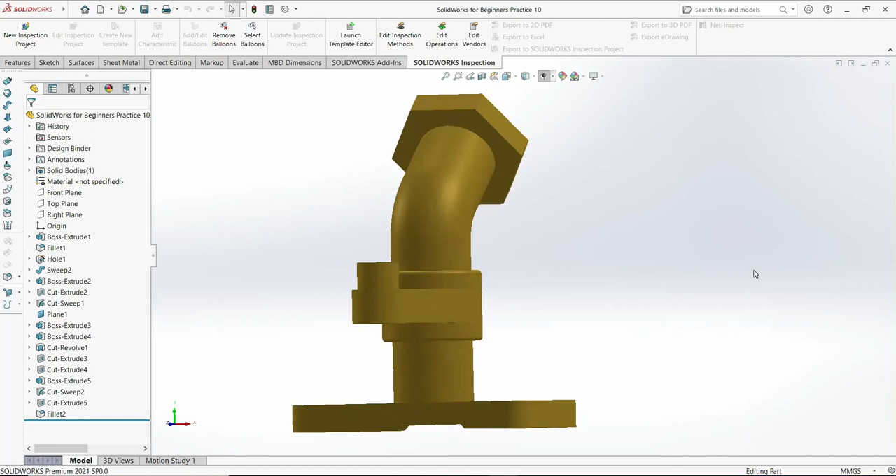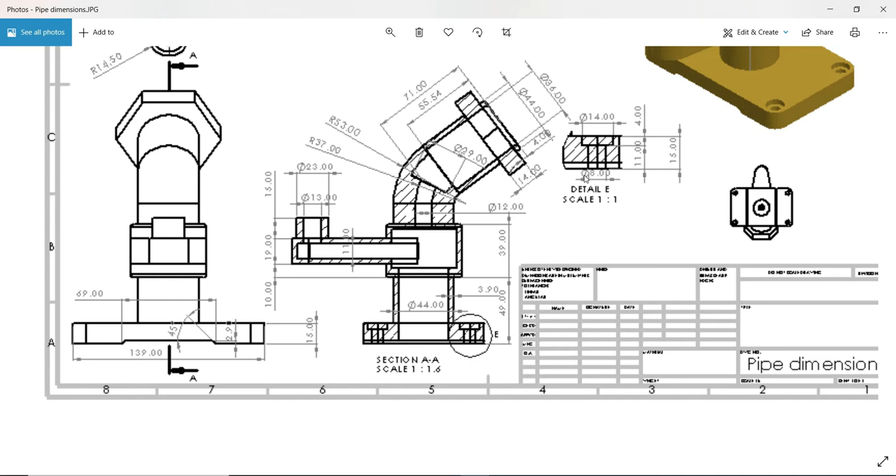Let's make step by step this drawing in SolidWorks, last version. As you can see inside, we have all this hole with different sizes. While we make this drawing, you will learn all these commands. I have the same one with the dimensions, and I'll leave the link below so you can follow along.

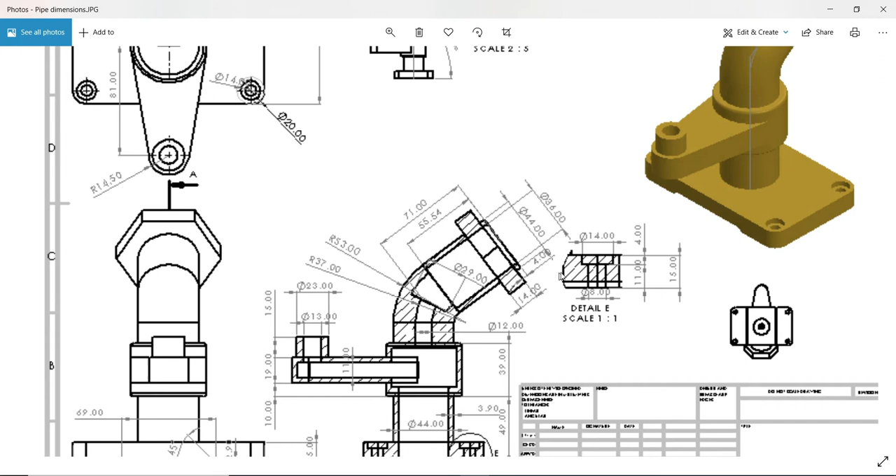We'll start with the base, which has dimensions 87 and 139 with a width of 15. Then we'll make this pipe in the middle of it. Then we'll make all these holes, which are counterbore holes—we have the detail for the hole here. We're also going to make this support in the middle and this arm.

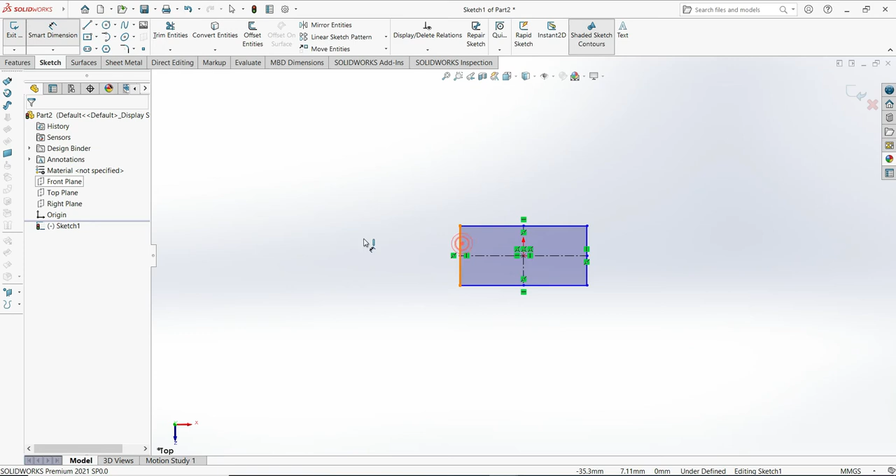Let's start here and go to SolidWorks. I'll start with the top plane first. Go to the top plane and activate the rectangle, center rectangle, and define the size: 87 and 139. Then okay, extrude base—here will be 15, very important, 15.

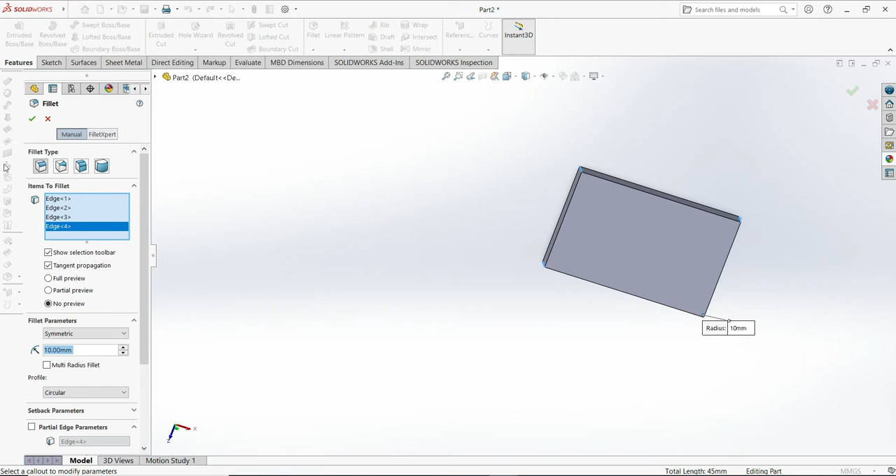Now we're going to use fillets, which will be 10 on all four edges. After that, we're going to use the hole wizard and counterbore. The option is 6. Make sure it is 8, 14, and 4. Choose the position, put your cursor, find the center, and click the center of each one.

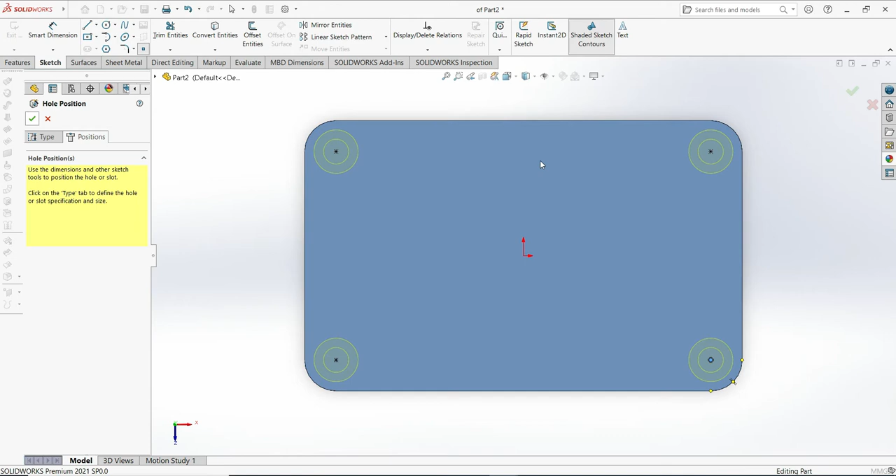And then OK. Now let's make the pipe in the center, using the right plane. I'm going to make a line like that, and then define the line with smart dimensions: here 119, and here 71.

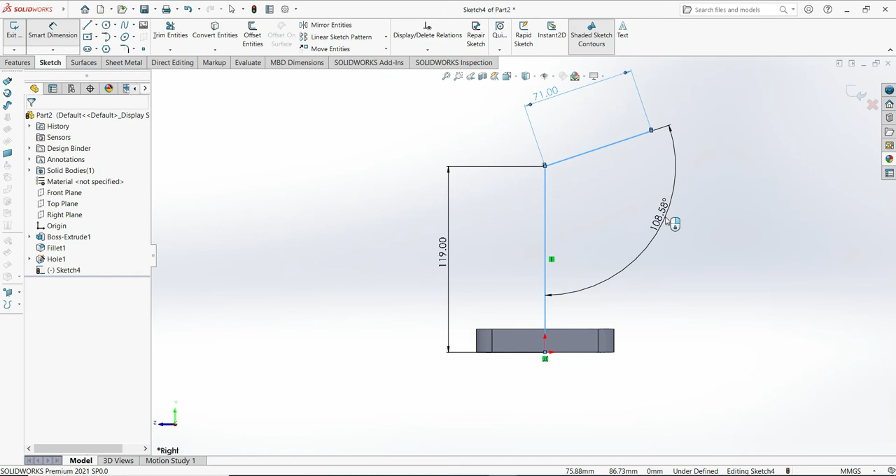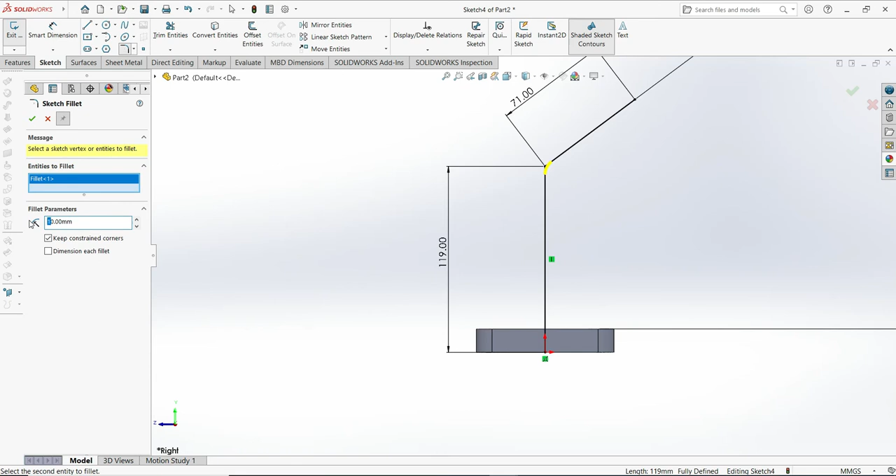Now we're in condition to use the swept base. Activate the swept base and circular profile, 44. Click OK.

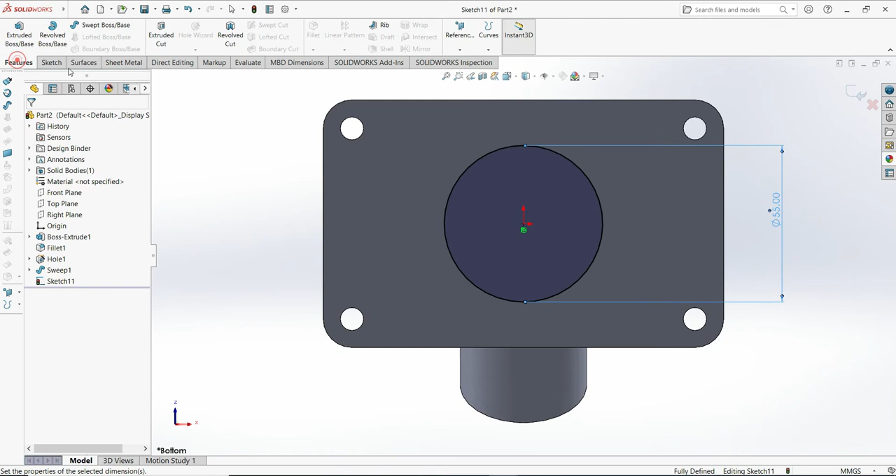Now we're going to make that support in the middle, using this base. The circle will be 55, and we're going to use again the extrude base, then here we'll use 39 for the size and offset. Make sure it's a reverse offset as well—reverse, then 49. Click OK. So we made the base.

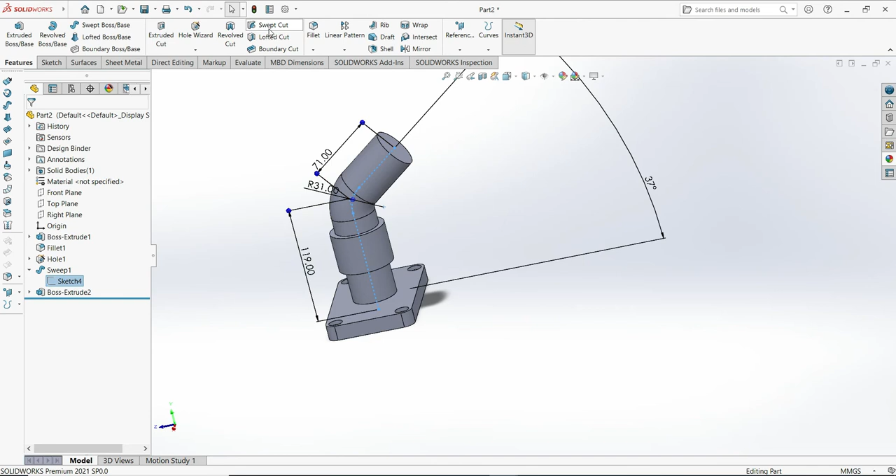Now I'm going to make the hole on top. Before that, let's look at the top. This hole will use a sketch we already made, and I'm going to use the sweep cut, circular profile, 11. So that one is done.

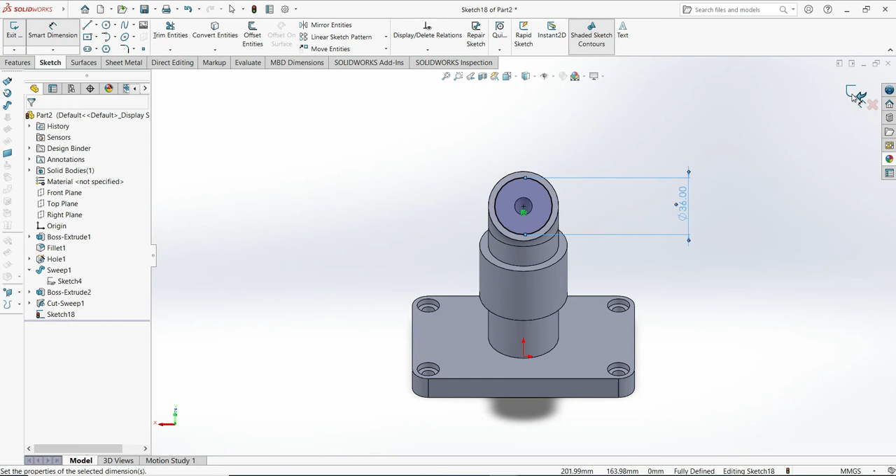Now let's make another hole. Here the diameter will be 38. Activate the circular tool and put 38 according to the drawing. Now we're going to use the extrude cut—very important, rebuild extrude cut—and here will be 55.54. Click OK.

Now this hole is done, as you can see, so it's there. Now let's go to the next step.

Here we're going to work in the right plane again, and I'm going to make another hole. First use that sketch, then convert entities, and make this line, right? Make sure it's perpendicular. Make one more line—go back here, make one more line which is a center line—and then make the angle 35, meaning here it's also 35.

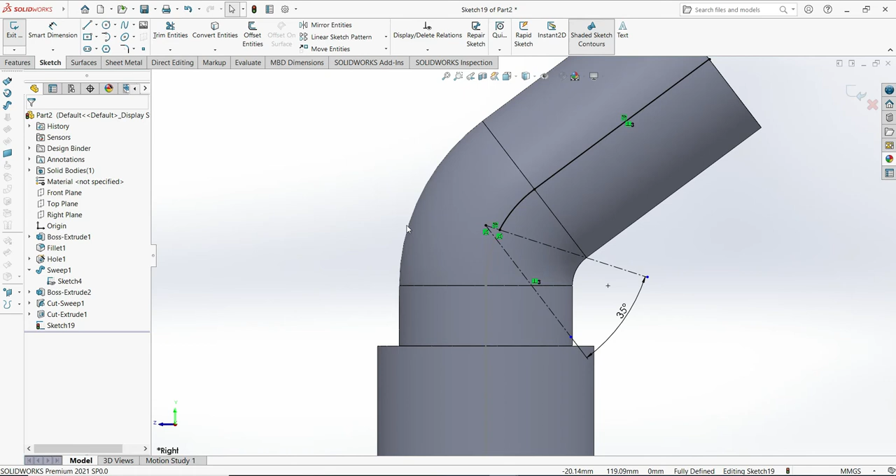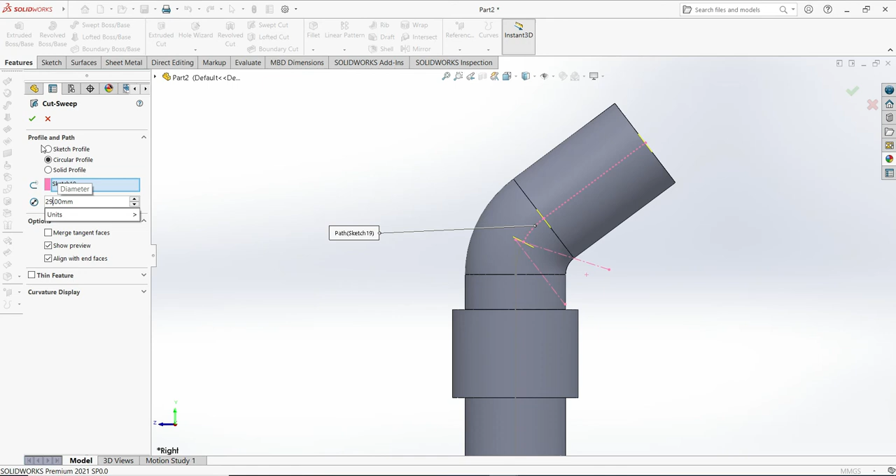Now we can use the trim and cut up to the second line, then rebuild. Now let's use the sweep cut again, circular profile, and the size will be 29—very important, 29 is the size of that. 29, then click OK.

So this part is complete as well. Now let's go to the next steps, and I'm going to make that arm.

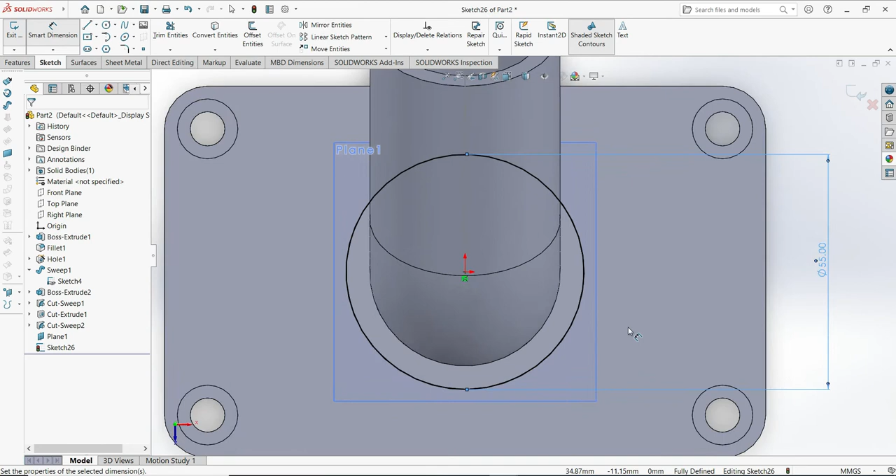For the arm, we need to make a plane, using these as reference—it will be a middle plane. Then we're going to sketch on this new plane: make the circle 55, smart dimension 55. Then we'll make a second circle, right? Just make sure it's well aligned, then make sure we're in this view, okay?

Now let's make another circle, this time in the same plane, with 29—smart dimension, 29 according to our drawings. Now we need to make the distance, which is 81, and join it with the center line, connecting this to here.

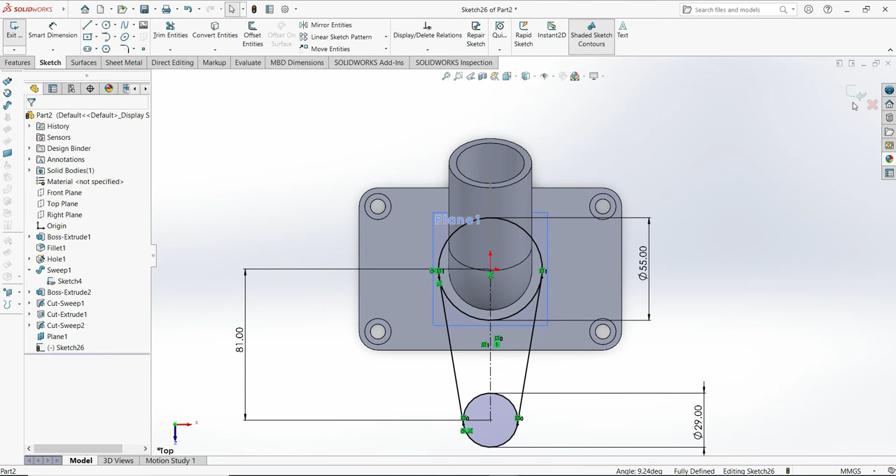Make sure this line is tangent. Now we can mirror entities, using this line and the center line as reference, okay. Now we can rebuild and use the extrude again—here it will be 19, and it's a middle plane, okay.

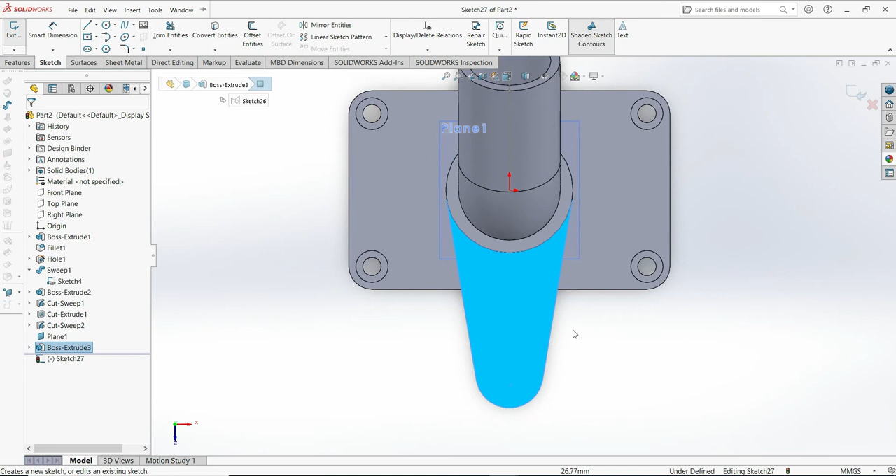Now let's make the top part here, one circle on this new side, okay. Make sure it's in the center. Here is 23.

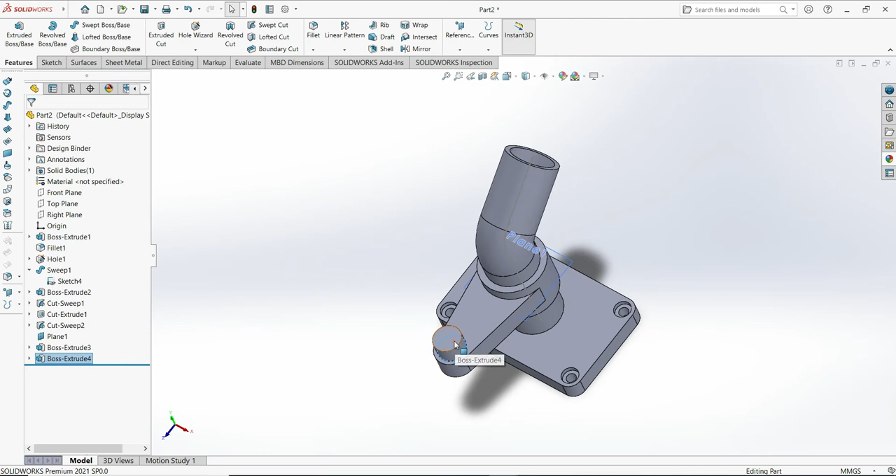Now extrude again, and it will be 15, 15, and then center, click OK. Now let's make a hole on that as well.

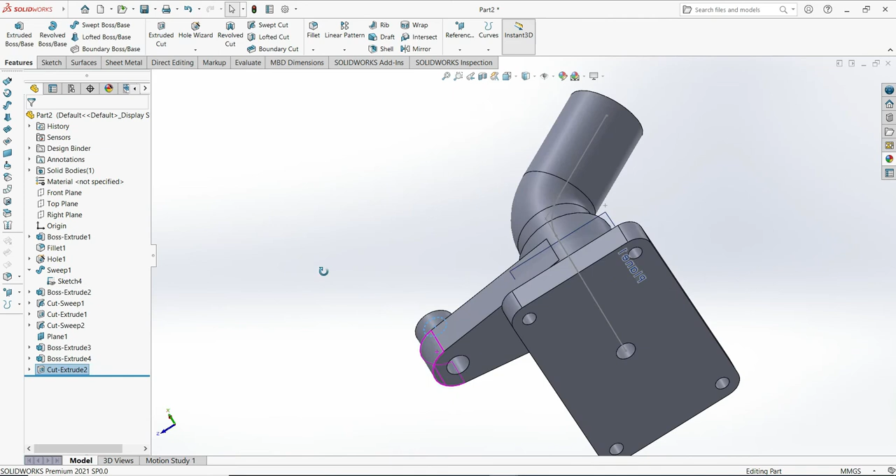I'm gonna put one more circle, will be 13 this time, smart dimension 13, and we're gonna use the extrude cut. Just position it very well so that you can see the extrude cut. We're gonna define up to surface, not up to next, because you have this hole, right? So we need to use up to surface.

So that's the one we want to use, up to the surface, okay? Very important here, so if you want up to surface, you will have to select what surface you want. If you don't select, this arrow must be up to surface, and then select the surface. So this means the hole is up to that surface. This step is very important, otherwise you will make it the wrong way.

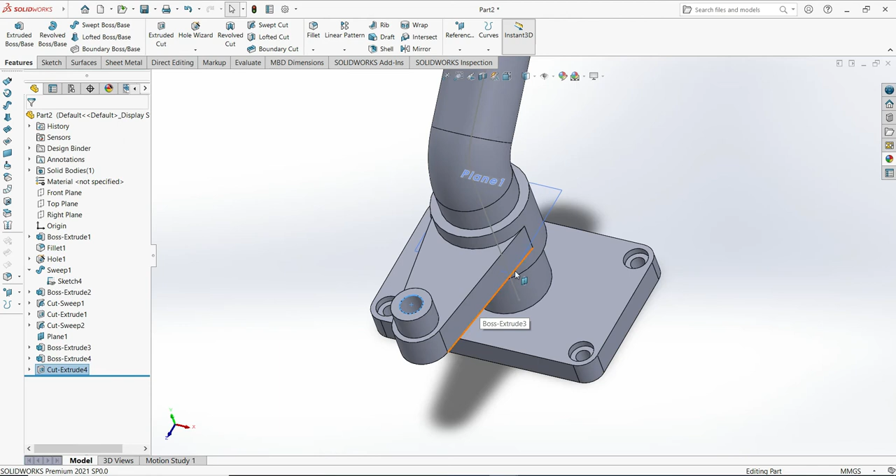After that, we can also make the hole in that arm. For that, we need to go to plane number 1, and then use the offset. I'm gonna use offset of 3.9 for all the sides, and then one by one, 3.9 for the first one.

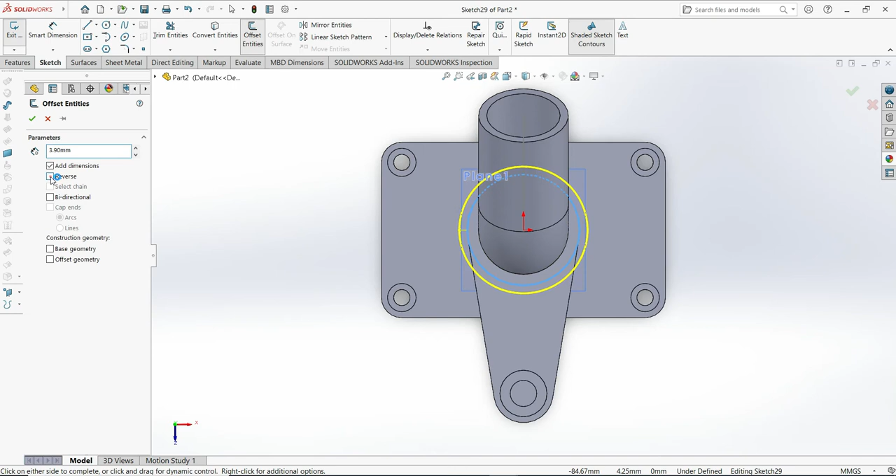Put it in reverse position here as well, and then offset again, 3.9 for all of them. Click OK, trim, and cut that one here. Make sure that this circle is concentric with the first one. This one here, they are concentric, very important here.

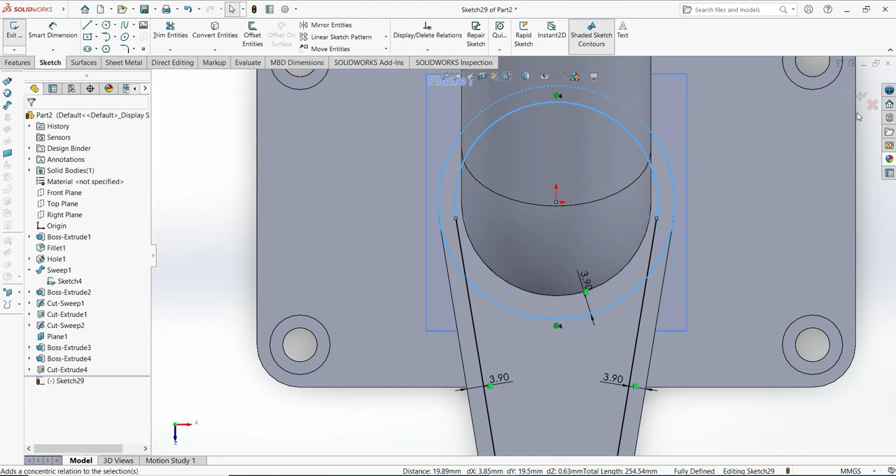And then rebuild. Now we're gonna use the extrude cut as well. Very important, we're gonna use the extrude cut, and we need to make the distance 11 this time, mid plane. So this part is also complete. So we are at the end of our drawing.

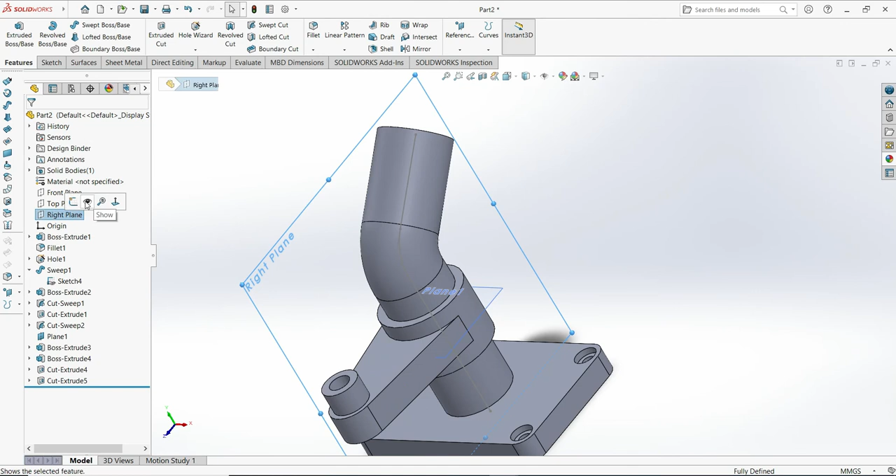Now let's make another hole in this part here. We need to make a center line just until there. Now activate the line and put it like that, up to there, and then one more line to join this one here, right?

Before that, we need to define the dimension, 3.9, and all this part will be 3.9. So this part here 3.9 as well, and from this part as well 3.9. So it's all 3.9. Now we need to make the last line from that point to this end.

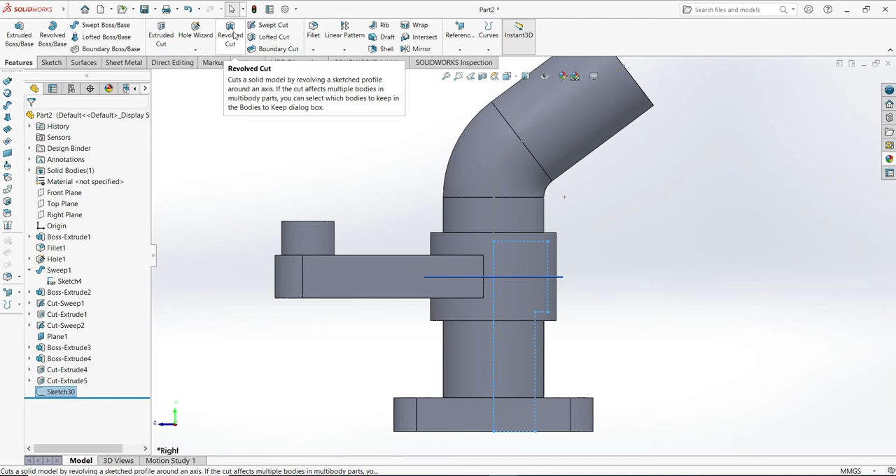Now we're gonna use the Revolved Cut to make that hole, and then click OK. So this part is also complete. We're gonna check at the end to see that we are all complete.

Now here we'll make that polygon. Make sure that the polygon has 6 sides, from the center, and make sure this polygon is also horizontal.

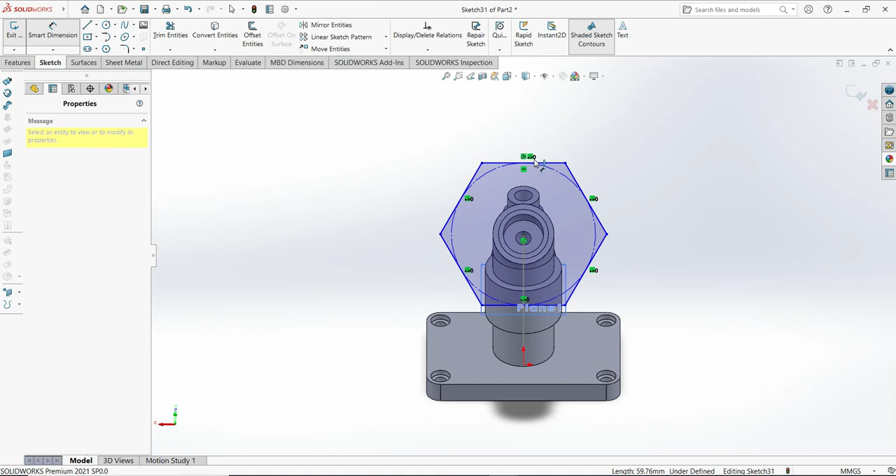Now we can convert, make the dimension first 66. Now convert entities for this edge, this circle, and then convert entity. Now we can use the extrude.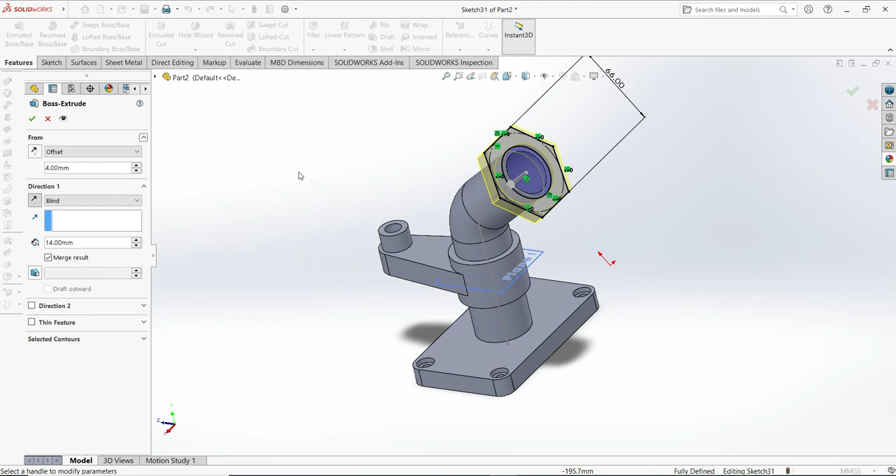Base, and make here the size which is 14, according to the drawing is 14. Now make reverse offsets and then put 4 in offset. Click OK, make sure that both are reversed.

So we are pretty much at the end of our drawing. Now we just need to make that cut in the base. We need to make the cut center line first from this point to that point. Now let's use the line as well, and make it just like that, right?

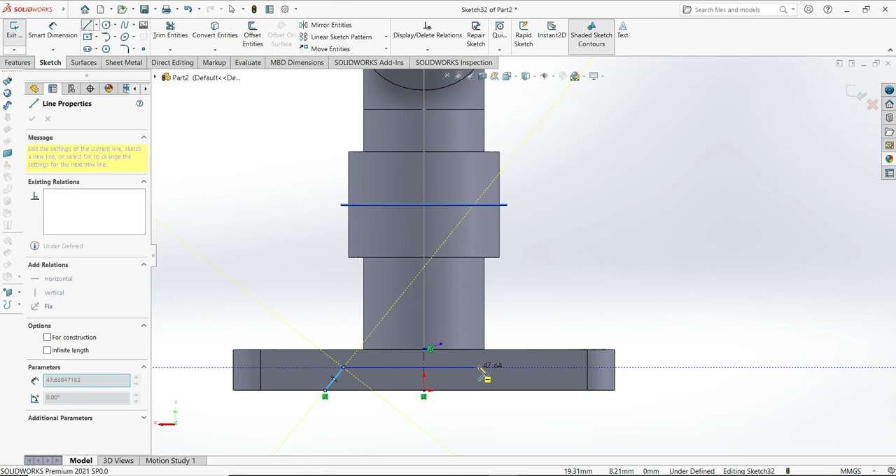This angle like that, and then click OK. Make sure that this line and that one here, they are not... we need to make sure they are not coincident first. Let's just repeat like that, right? And then click there. Now select this one and this one, and make them symmetric.

Make symmetric. Now let's select the angle, these two, and they will be 45 degrees, the angle like that. Make sure that you do it the right way. We need to make sure that this one and this one are 45 degrees.

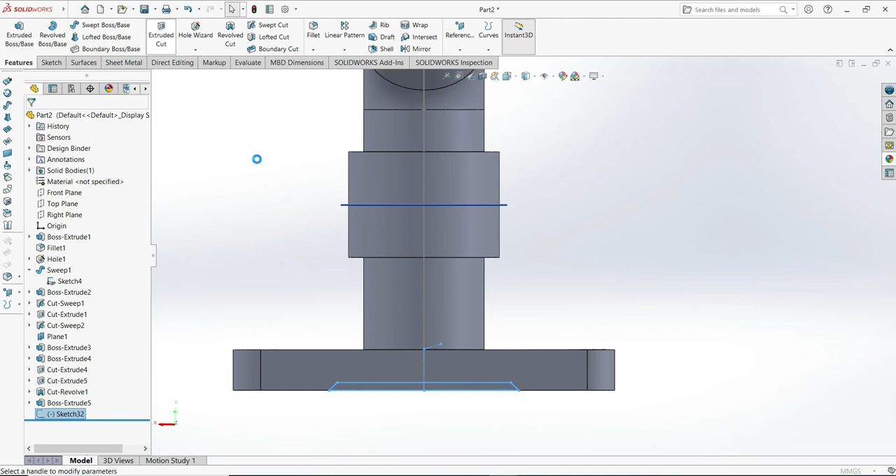Now let's make the smart dimension for this edge strip, 2.9, and here it will be 69. Now rebuild, we can use the Extruded Cut again, and here up to next, because we want all of it up to next, and then click OK. As you can see, on the bottom we have that one, so that's what we want to achieve.

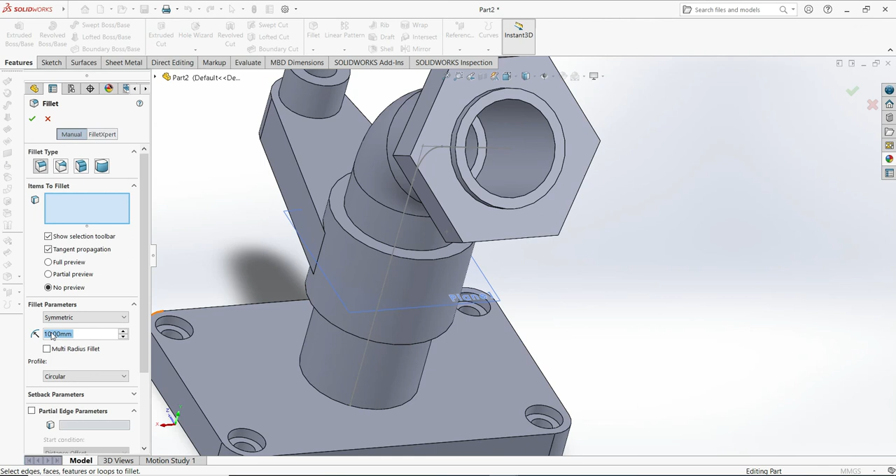Now we can go make some final touches, or what will be the fillet there. The fillet is 2, make sure it is 2 on both sides, just not 2 millimeters, not 200, that's why it's giving me this mistake. Just make sure the radius is 2, and then click OK.

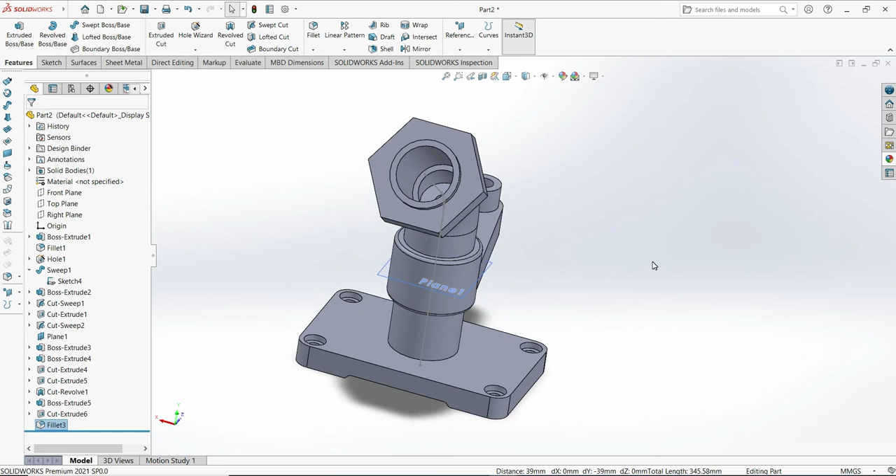So it's done. Now we can make the appearance. Just go to appearance, material, and that's the color we use. Now you can put the cut to see how it's inside. As you can see, we have all this hole inside, and that's the way this drawing should be done. So you can see all the holes according to the drawing.

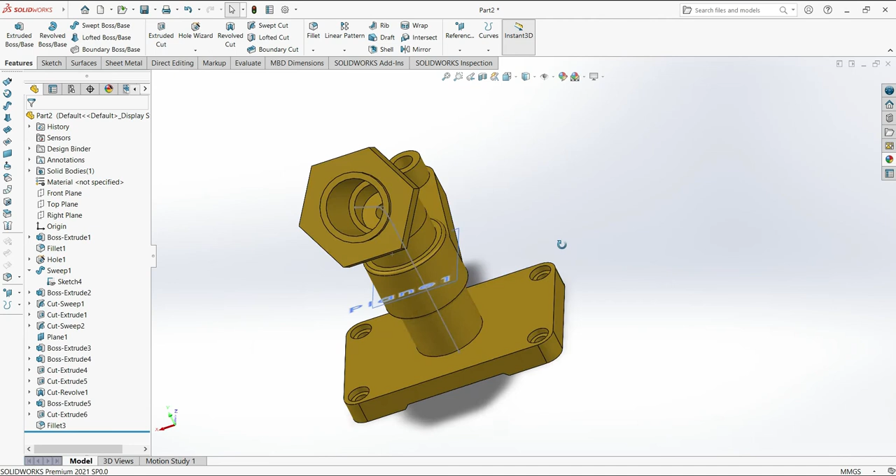Now you can also change the color if you want. You can just put the color according to material. So that's the way we do this drawing.